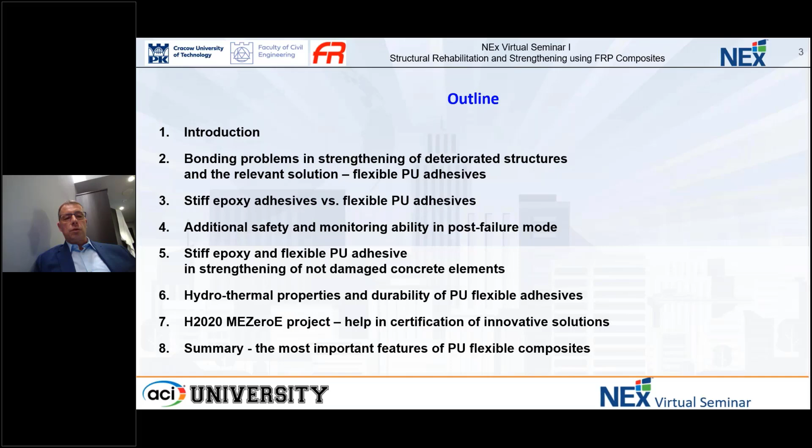I would like to present today, after a short introduction, bonding problems in strengthening of deteriorated structures and relevant solutions for it, meaning flexible polyurethane adhesives. I will compare stiff epoxy adhesive versus flexible polyurethane adhesives, and talk about the possibility of additional safety and monitoring ability in post-failure mode. I will also present some possibilities of strengthening non-damaged concrete structures using stiff epoxy and flexible polyurethane adhesives, talk about the properties of polyurethane flexible adhesives with respect to hydrothermal properties, give some words about the ongoing Horizon 2020 project on certification of innovative solutions, and then in summary present the most important features of polyurethane flexible composites.

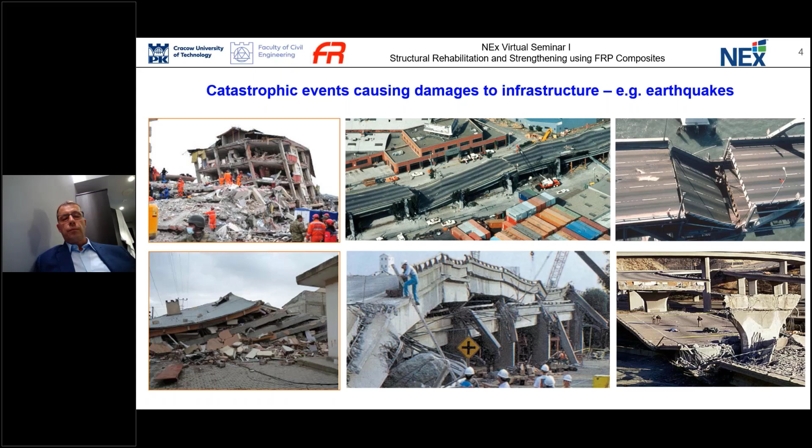If we go around the world, we have many catastrophic events like earthquakes that can influence damage to structures. If the damages are serious, especially to infrastructure like bridges or viaducts, we have problems with escape roads. So such catastrophic events affecting infrastructure should be avoided.

Of course, if structures are damaged or seriously corroded, we have three options: we can demolish and reconstruct them, we can do nothing, but the most appropriate is retrofitting. This requires less time and less money, and has a lower environmental impact. Nowadays we use carbon fibers as the composite material able to improve structural properties, as was presented in the last presentation.

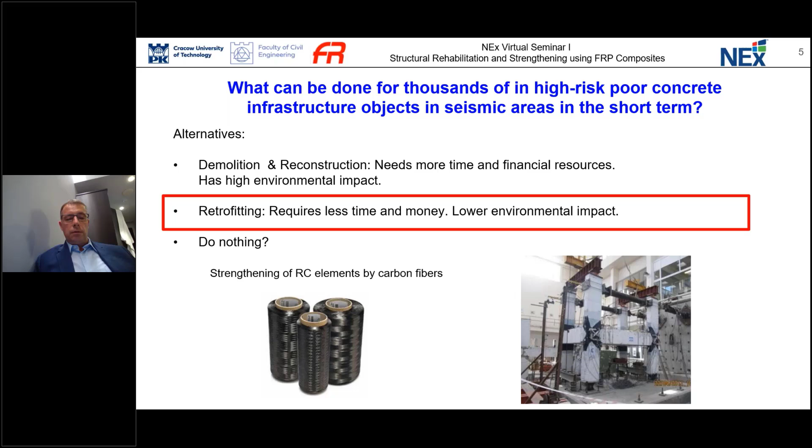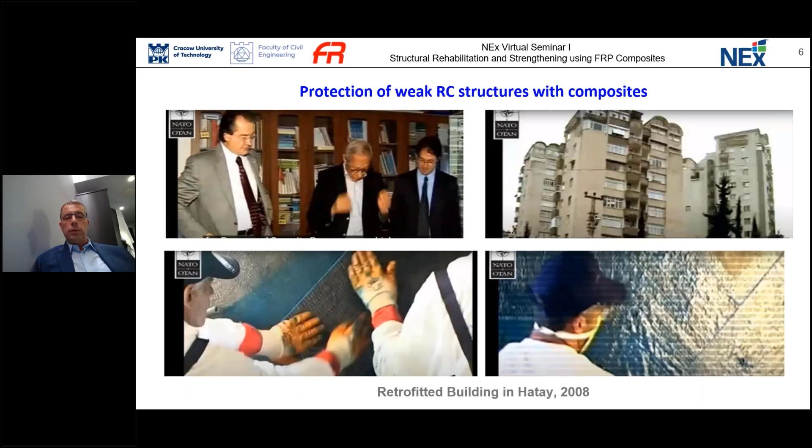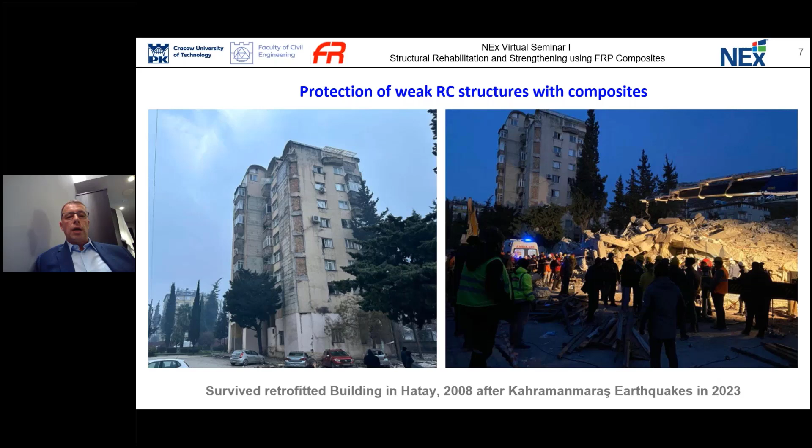I would like to show shortly the effectiveness of such intervention. This is the view of three buildings constructed in Turkey, in Hatay. In 2008, one of these buildings was strengthened with composite fibers by Professor Alper İlki from Istanbul Technical University. Fifteen years later, during a very huge earthquake in Hatay, two buildings collapsed, but the building strengthened with carbon fibers survived this catastrophic event. So it is some kind of proof that it is suitable and worth using composite materials for strengthening structures.

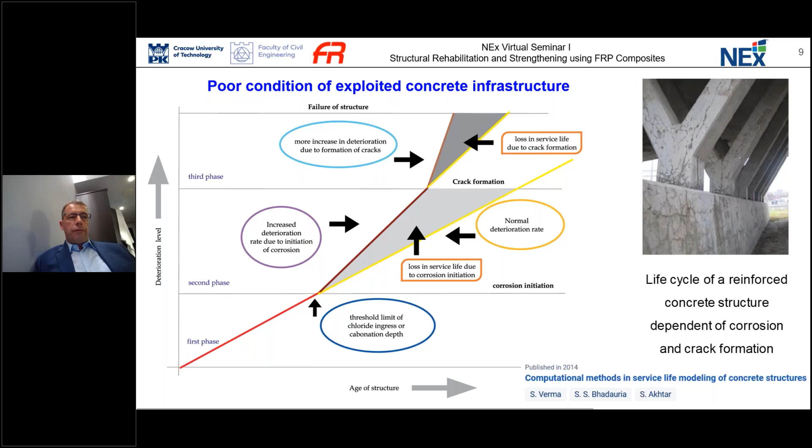Coming to the problems with our infrastructure, we know that over many years structures start to deteriorate, first by initiation of corrosion, then by formation of cracks. The life cycle of reinforced concrete structures is shortening, and in this case we have to consider turning off such structures and stopping their exploitation. So to have the possibility to explore it more, we should think about improvement. Of course, if the structure is seriously corroded, it can cause sudden damage, as presented in the viaduct in Fossano in 2017, where very corroded concrete was the source of this catastrophic event.

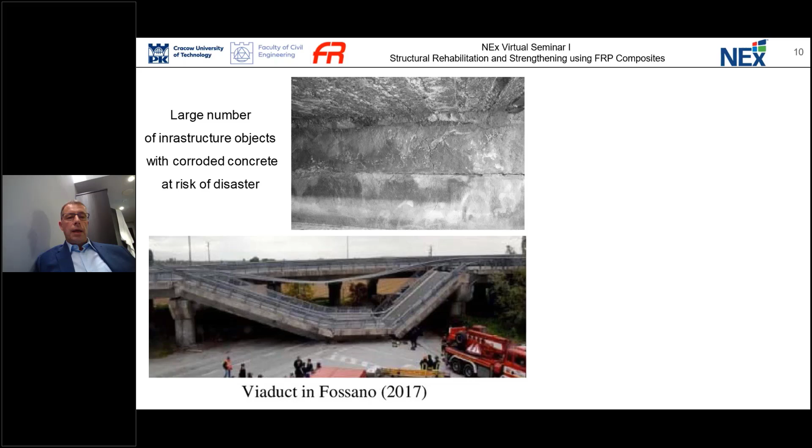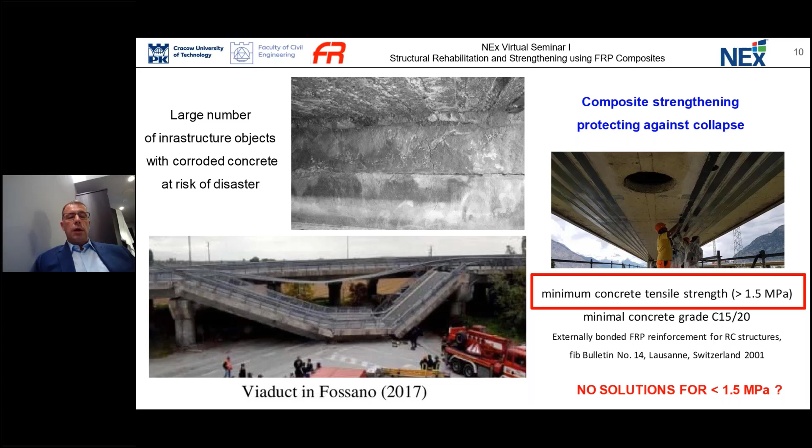If we would like to improve strength nowadays, the most popular method is composite strengthening, mainly carbon fiber laminates, but there are requirements for using it. As the fib bulletin presented in 2001, the minimum requirement for concrete strength is at least 1.5 megapascal of tensile strength, measured in pull-off tests. So if the structure is very corroded and the concrete is of poor quality, it typically has lower values, and the question is whether there is any solution for this problem if we would like to use composite materials.

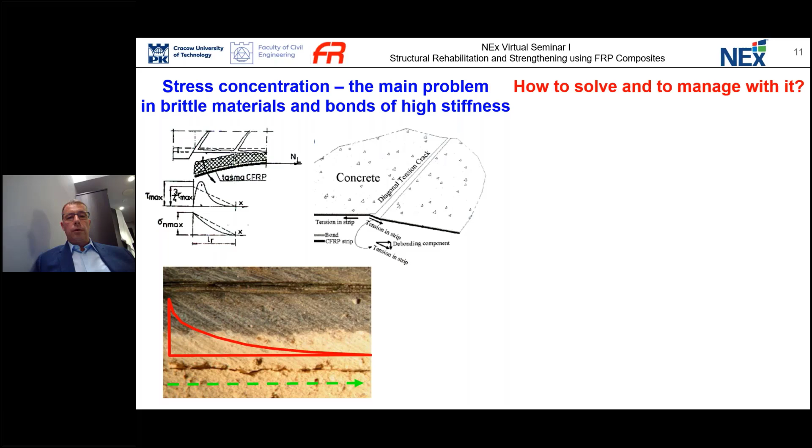One of the most critical sources of damage is stress concentration. When we use brittle materials, high stiffness materials, we have a stress concentration problem, especially with high stiffness materials. This appears mainly in places with cracked structures, but also in the bonding area where high stiffness composite material is bonded to a very weak substrate. In this case, stress concentration causes micro cracks, then larger cracks, and the structure goes to failure. So how do we solve and manage this problem?

It is very simple, because to avoid stress concentration, we should evenly redistribute stress. In this case, we are able to protect the weak substrate because evenly redistributed stress is of lower intensity. If we bond two stiff and high strength materials with brittle and stiff materials like epoxy resin, we can expect stress concentration. If we apply more flexible material, we redistribute the stress more evenly, and we can make more effective bonding of such application.

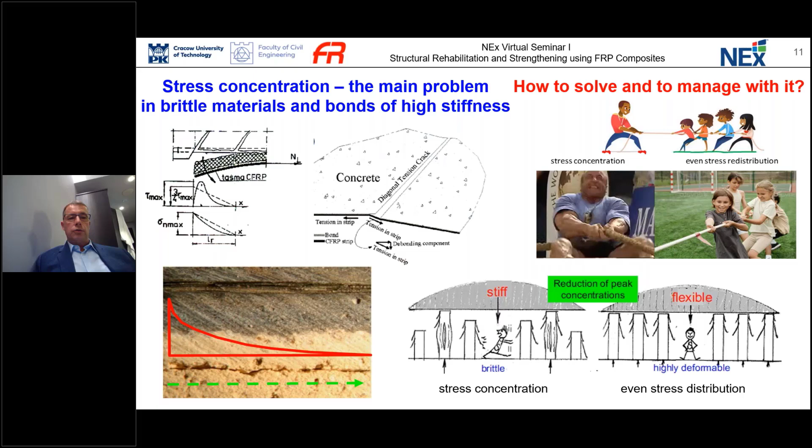Nowadays, we typically use polymeric resin, mainly epoxy, in fiber and steel reinforced polymers. Also, in the last 20 years, we use mineral cement or lime mortar as a matrix in strengthening of structures. In this case, we use fabric reinforced cementitious matrix, FRCM, textile reinforced mortar, TRM, or steel reinforced grout, SRG. Also, now it is available to use highly deformable polyurethanes, fiber or steel reinforced polyurethanes, and this kind of solution is suitable for strengthening of materials, mainly concrete or also masonry, when the tensile strength of the substrate is very low, under 1.5 megapascal.

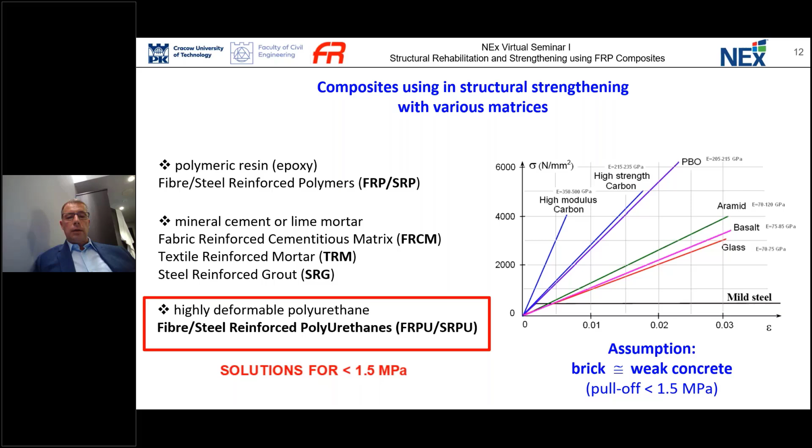Let me make an assumption for the next comparison, that brick and weak concrete are practically of the same strength. So in pull-off test, we have under 1.5 megapascal. I would like to present some tests. This is the brick tested in 4-point bending. The original brick was broken.

Next, in the place of the crack, the brick was strengthened, rebonded again with 3 kinds of materials. If we assume that 100%, this red bar, is the original strength of the brick, and we repair it with strong cementitious mortar, we receive lower ultimate strength. When we apply high strength epoxy resin, we are able to improve the strength of the weak material by about 7%. When we apply flexible polyurethane, PM type, the increase of ultimate strength is almost double, and also the damage is in the form of cohesive failure of the polyurethane.

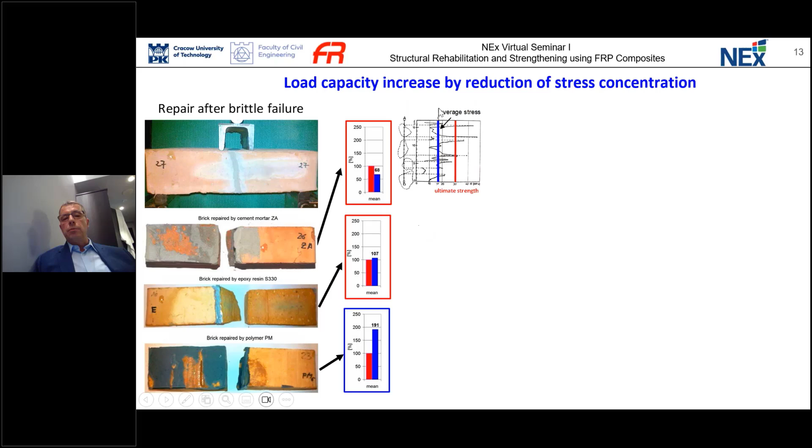Why is this? Because if we have a brittle, high strength material, we have a lot of stress concentrations between gravels, and they can form micro cracks that then link into a main crack. When we rebond it with stiff material, we do not improve the situation. But if we do it with flexible material, we redistribute the stress more evenly, so we are able to increase the ultimate strength.

If we consider the shear lap test, single shear test, you can see that if we bond the composite material to the weak substrate with stiff epoxy resin, we have stress concentration, and after initiation the crack propagates through the whole bonding area. If we bond the structure with flexible material, we redistribute the stress more evenly, reducing the peak of stress concentration, protecting the weak substrate, and also increasing the ultimate force.

This is the example of 2 cases, CFRP material and SRP material, carbon and steel fibers as strengthening material, with epoxy resin shown as the yellow bar, and flexible polyurethane shown as the blue one. You can clearly see that when we use epoxy resin, the ultimate load capacity is up to 7 kilonewtons. If we apply the same system with flexible polyurethane, we receive 12 kilonewtons of ultimate load. You can clearly see this for both systems, one with steel fibers, another with carbon fibers.

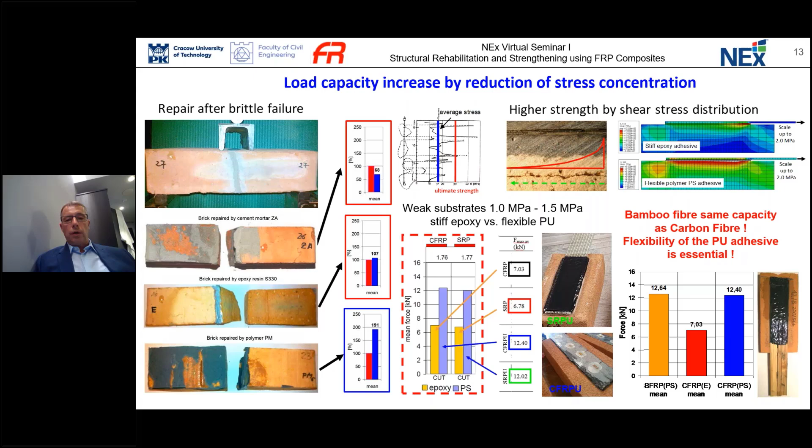Also, when we compare steel reinforced polyurethanes, where we have steel fiber bonded with a flexible polyurethane matrix, and compare it with stiff adhesives, you can see clearly the behavior of this system. If we increase the stiffness of the polyurethane, we receive a higher value, but of the same stiffness level. But when we apply flexible polyurethanes, we receive a much higher ultimate load than in the case of stiff epoxy resin, and also very high damage energy, which is the area under this curve.

What is also tricky is that if we use some composite materials in masonry buildings, in this case we have plasters.

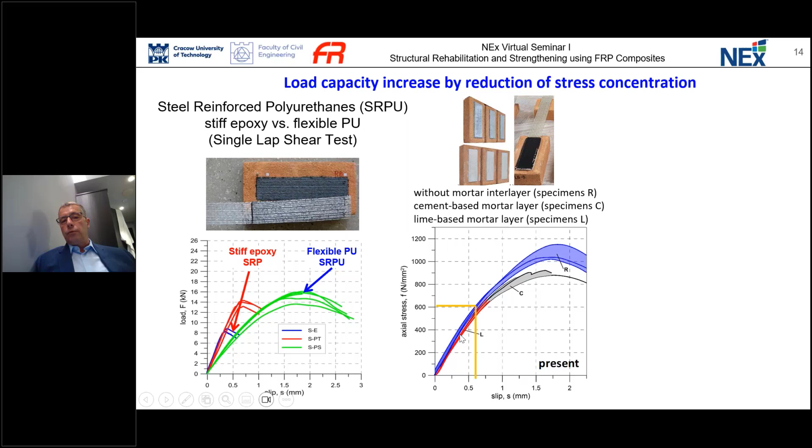So we did some comparison tests. Mainly, we bonded the steel fibers directly to the bricks - this is the blue line. When we bonded the same system but by interface, meaning a cementitious layer, we received this kind of behavior. If we used very weak lime mortar, because this kind of material is used in heritage structures in Europe, we receive directly this red line. You can clearly see that the behavior of this system is very similar to the behavior of this flexible bonding material. If we compare in literature, at the same scale, the effectiveness of this system bonded on the plaster with flexible bonding, it is clearly more effective than lime mortar strengthening with composite materials using the same steel fibers as a matrix.

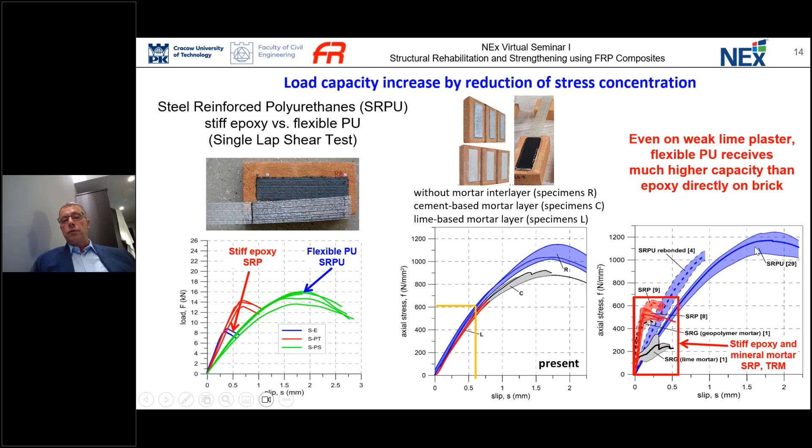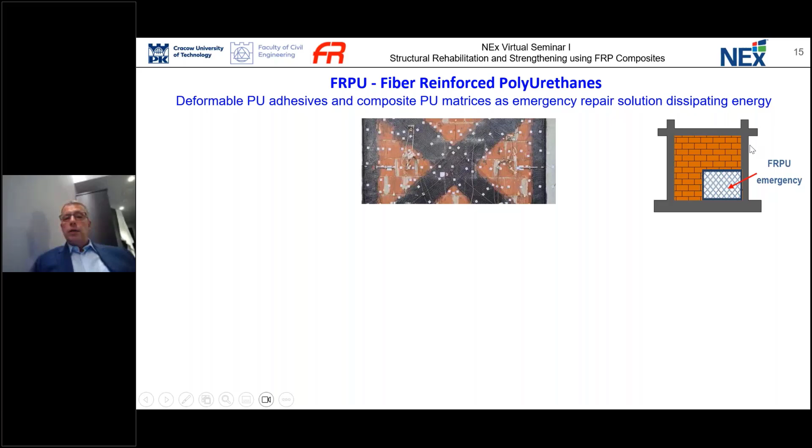I also present the ability of this kind of matrix to deform, transfer and dissipate energy when the load is dynamic or in fatigue. So we used it in strengthening of weak masonry infill when we had a reinforced concrete frame system. In this case, we used glass fibers in a polyurethane matrix that were bonded to reinforced concrete columns and slab, and also to the masonry. Both systems were constructed on a 3D real scale building that was put on the shaking table, and we were able to protect this structure against out-of-plane and also in-plane failure.

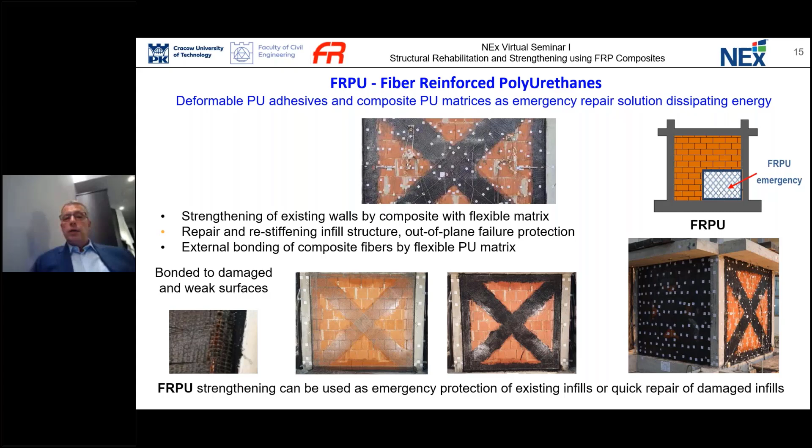So I would like now to present some cases and movies from this shaking table. On the left hand side, you can see the masonry infill wall, protected here with a different type of flexible bonding - let me show you how it works. You can clearly see that the structure is losing its stiffness, and finally at the end of this test it did not collapse, due to protection with polyurethane flexible bonding at the interface between masonry and the reinforced concrete structure. The global stiffness was lost from 100% down to only 6%.

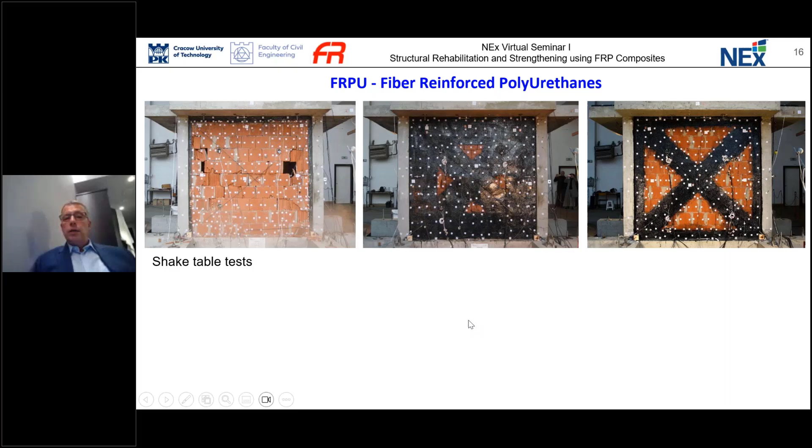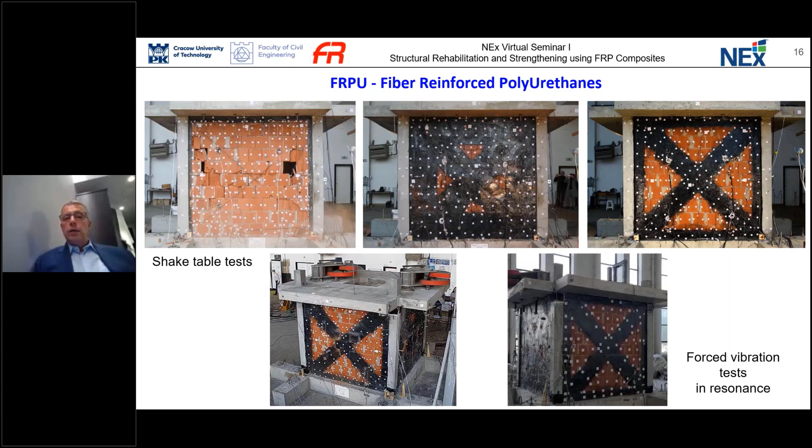After that, we protected this kind of infill wall with an FRPU system. So in the middle, you see protection against failure of this kind of wall without any special application, smoothing of the surface. We bonded directly the fibers using the polyurethanes, and in this case we were able to stiffen the whole structure. The owner of the shaking table was unable to damage this structure with this system, so they tried to damage it with forced vibration in resonance, mainly by application of special exciters on the top. As you can see, during this resonance test, which lasted 2 hours, they were unable to damage this structure.

Also, the proof of the efficiency of such flexible bonding systems was the quick emergency protection of a concrete retaining wall that was being demolished on an active slope. In 1 minute, the movement of this wall was about a few centimeters, so it was a really serious danger because the house was able to collapse. We had to stop it. Within a few hours, we stopped the movement of this retaining wall on the active slope.

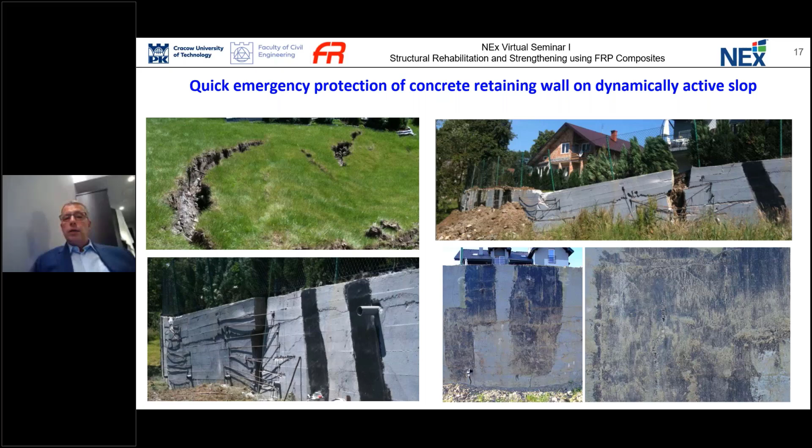So why is this kind of solution so effective? Typically, if we calculate composite materials strengthening brittle materials, we use a fracture energy approach. In this case, we assume that the composite material is stiffly connected with the substrate, and we calculate the fracture energy that allows us to transfer these forces.

So with the bonding length - meaning the length of the composite material that is connected to the substrate - if the bonding length is under the effective bonding length, the ultimate length that is working, we are in this curve position. If we increase the bonding length, we are able to obtain this maximum capacity. And if we obtain this maximum capacity with brittle and stiff materials, the peak of stress concentration cracks the substrate and transfers up to the end of the structure.

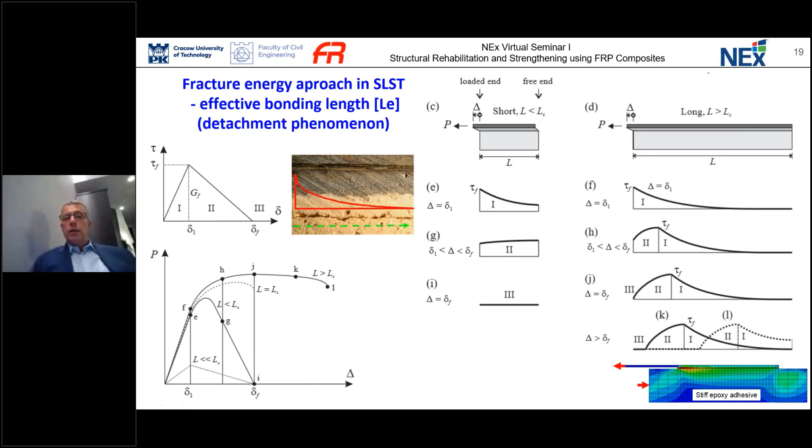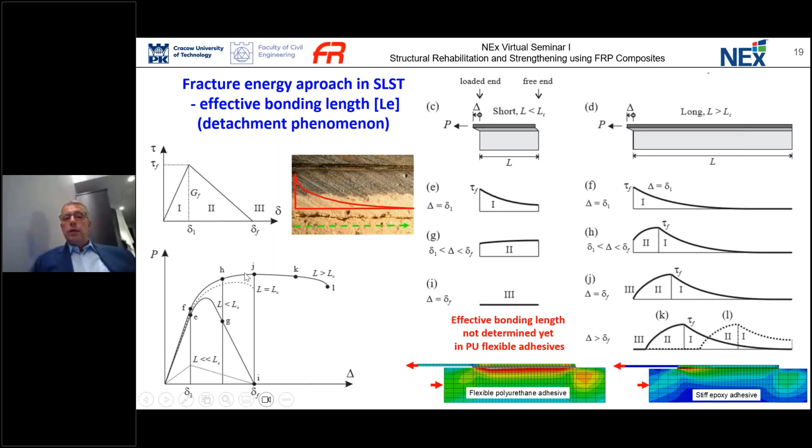So you can observe this process here. This is mainly with stiff epoxy resin when we use it for bonding of composite material. What is very tricky is that when we use flexible polyurethane adhesives, we are still under the effective bonding length, so we still have the possibility to increase the capacity of the system.

But what is very interesting, after unloading, the structure moved back to the previous position. So in this case, we give time for evacuation, and also we give authorities time to decide how to manage such a structure.

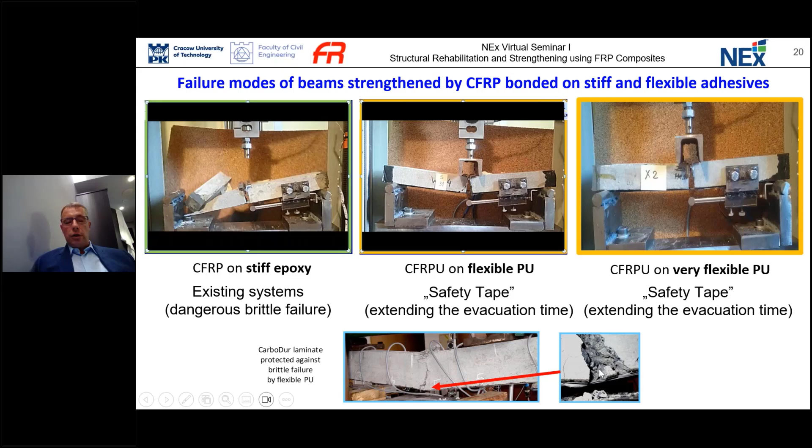Also, as you can see here, there is high stress concentration acting on the composite material. Typically, if it is stiff material, such a structure doesn't work, but with flexible material, it is able to work.

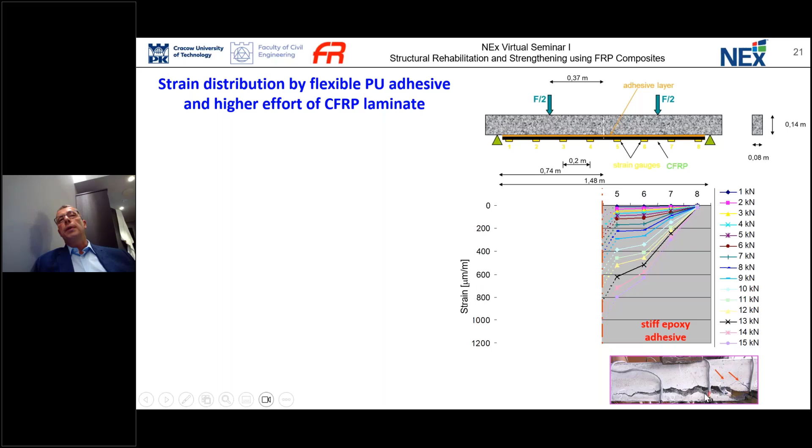If we compare the effort of this composite material when we have stiff epoxy resin, we can compare it according to the load. But finally, we can expect very sudden failure, especially in the weakest part, that is the reinforced concrete, the place of location of reinforcement in the concrete.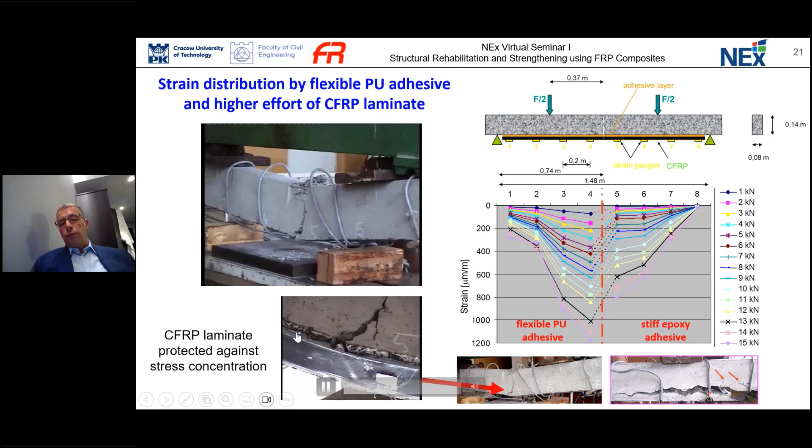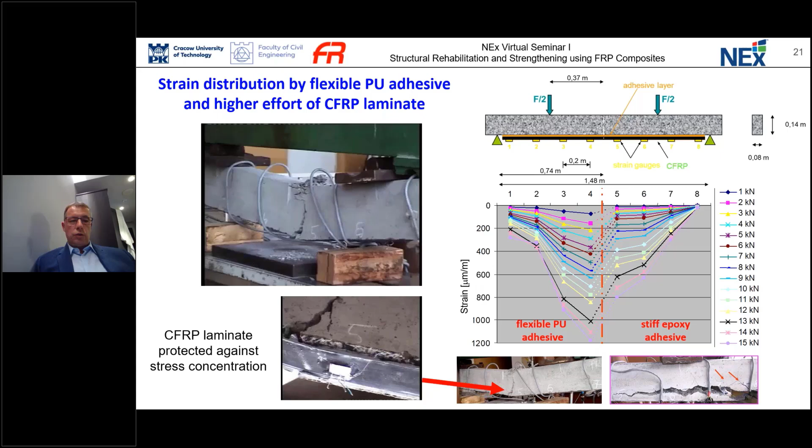Even after removing this part, you can clearly see that this kind of flexible material is able to dissipate energy and clearly protect the composite material against stress concentration. So the composite material is not damaged.

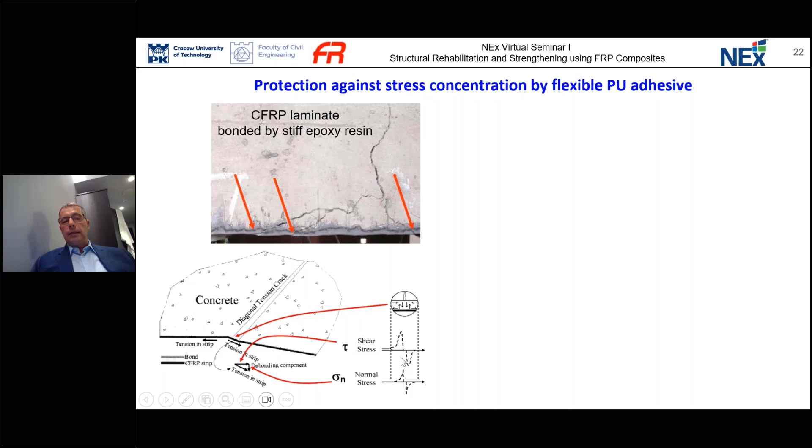So if we would like to protect the composite material because of cracks in stiff epoxy resin, the crack generates in this place very high stress concentration that is acting on the composite material.

If we have flexible material, you clearly see here that the crack is stopped in the flexible adhesive layer, and in this case we do not have the stress concentration attacking the composite material, because the stress is redistributed more evenly on the whole surface.

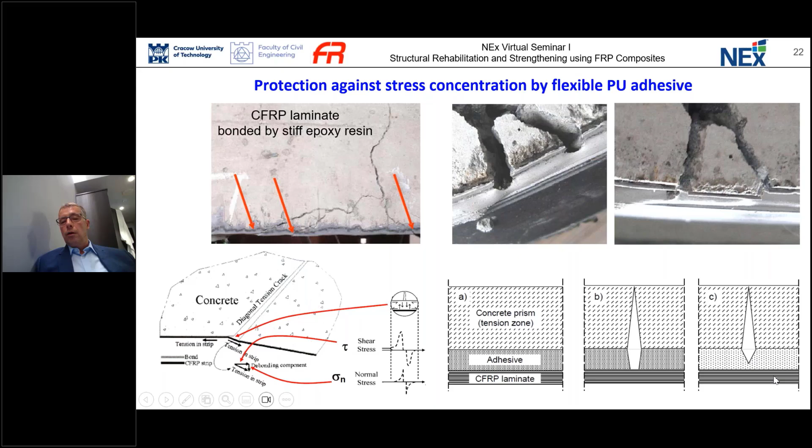So let me say something about additional safety. This is an experiment on a beam that was failed by fatigue tests. So after this fatigue test, the lower tensile reinforcement was broken.

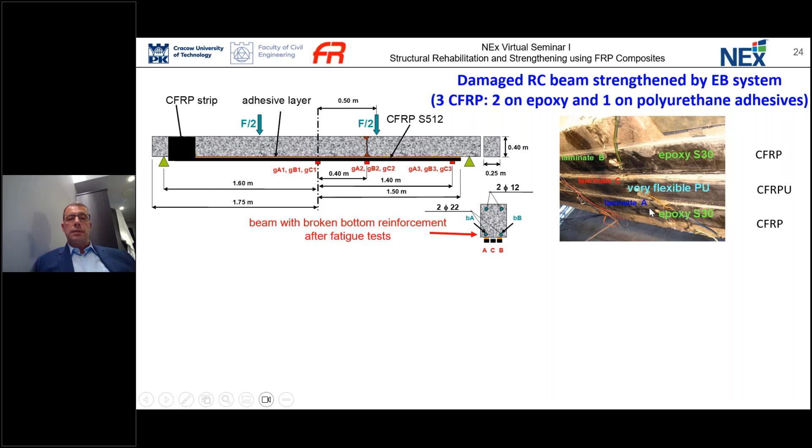So after reconstruction, the strengthening and tensile forces were carried out by 3 carbon fibers. 2 of them were bonded on epoxy resin, stiff epoxy resin, and 1 on very flexible polyurethane.

During the test, you can clearly see that in one moment, laminates bonded on epoxy resin suddenly failed and detached, and everything was hanging on the laminate bonded on flexible polyurethane. Here you can see cohesive initiation of failure in the cohesive layer.

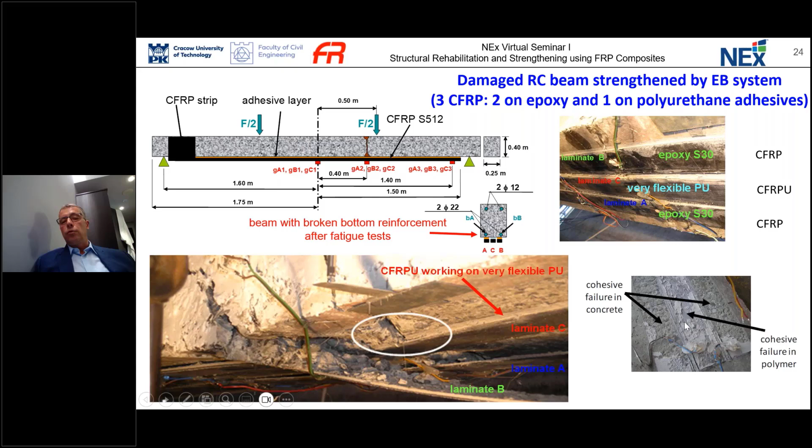So finally, when we detected the failure, you can see cohesive failure in concrete in epoxy resin, and cohesive failure in polyurethane in the case of the very flexible polyurethane strengthening.

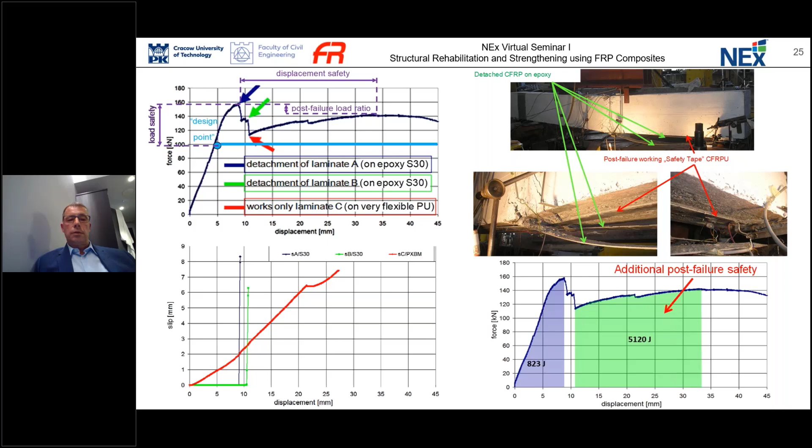It was also confirmed in another kind of test in Portugal. We had the slab, but we applied not an externally bonded system, but a near surface mounted system, so carbon fiber was installed in a groove at the bottom of the slab with 2 kinds of epoxy adhesive.

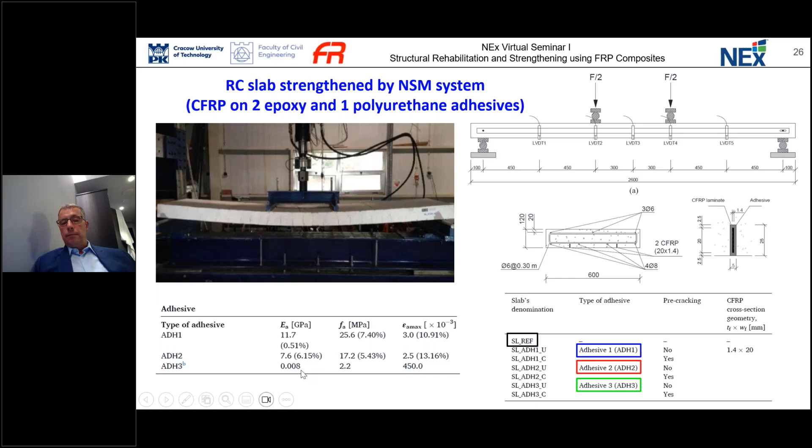You can see 11,000 megapascal stiffness. Another one was 7,000 megapascal stiffness, but the polyurethane flexible bonding was only 8 megapascal system. So we tested 2 kinds of structures. One was uncracked and another was pre-cracked when we installed the NSM system.

The blue and red curve in both cases represent the adhesive with stiff epoxy resin, while the green one represents polyurethane. As you can see, practically these systems do not differ so much, but in the case of polyurethane adhesive, we have the post-failure resistance that can improve additional safety to the structure.

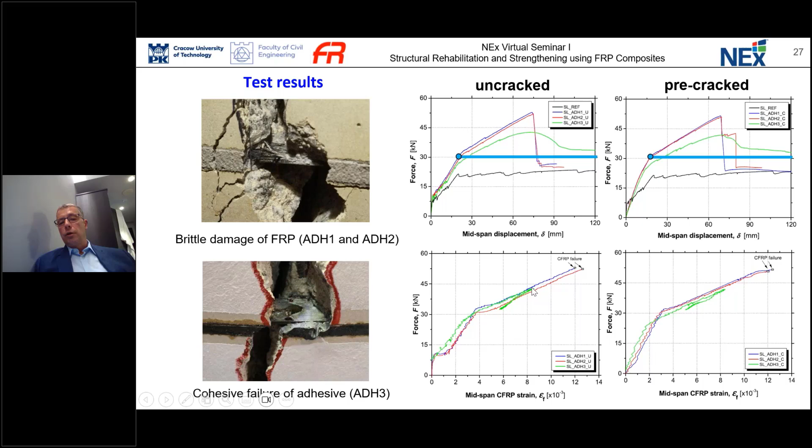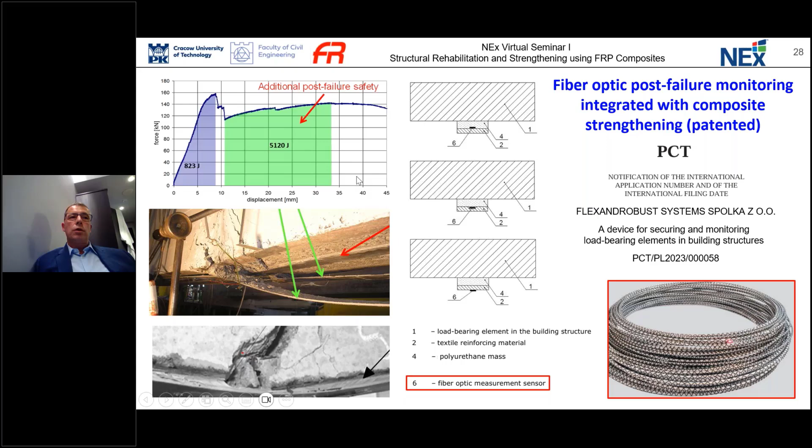This is also confirmed when we observe the strain measured on the composite material. So if we have such ability to apply this kind of flexible bonding, it is also useful to integrate it with some kind of fiber optic measurement system that can monitor the structure after failure. In this case, we give authorities post-failure information on how the structure works, if it is safe, if we can still use it, and what can we do with it.

I would also like to show you some examples of tests with undamaged, reinforced concrete beam. In this case, with the same system, we used the same type of carbon fiber, but the only difference was epoxy resin in one case, and a polyurethane adhesive layer on the other side. So you can compare the Young's modulus of these systems: epoxy resin had 12,000 megapascals, while polyurethane PT 600, PS 8, PST 6, had 2.5 megapascals.

On the other hand, you can compare the elongation. We start from 0.22% for epoxy resin up to 150% for PSM type polyurethane flexible adhesive.

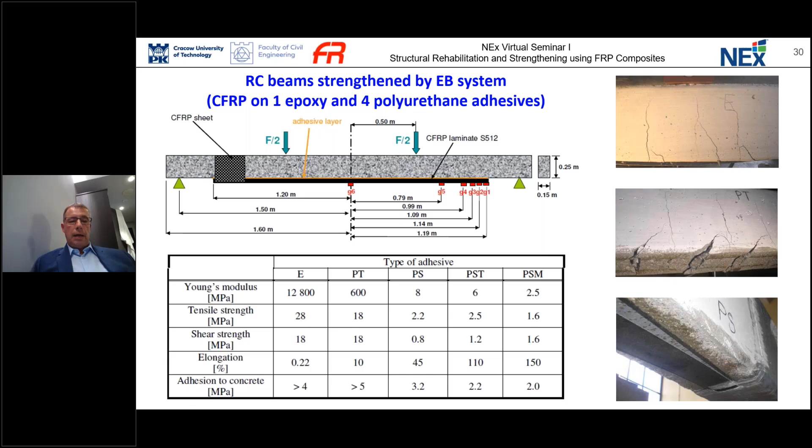If we compare, on the same scale and same graph, the curvature of behavior of this system with a reinforced concrete reference system, you clearly see that all these systems practically behave in a similar manner. This dark blue line represents the epoxy resin.

As you can see, the slippage at the end of the system shows practically no slip for epoxy resin, but even a small amount of slippage, 0.3 millimeters at the end of the system for this PS flexible bonding, makes a very big difference and improves the behavior of the structure, even with higher capacity than the epoxy resin.

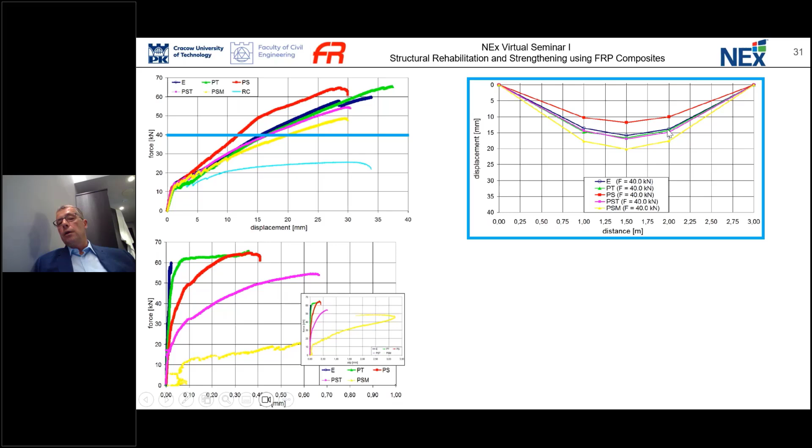What is also tricky is that when we compare one level of load, you can clearly see that we received even lower deflection using flexible adhesive than using very high strength, stiff epoxy resin adhesive. Why is that? Because, as I said previously, when we have stress concentration, the crack goes through the stiff epoxy resin immediately and attacks the composite material, causing stress concentration.

If we have higher stress, we have, of course, higher elongation. In the case of flexible material, we stop the crack in the adhesive layer and redistribute the stress more evenly. So in this case, the peak stress is lower, and the elongation of the composite material is also lower. So in this case, the confinement effect is more promising.

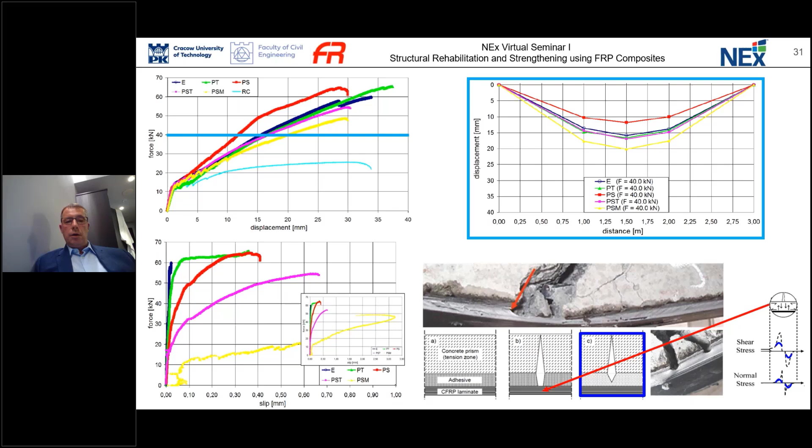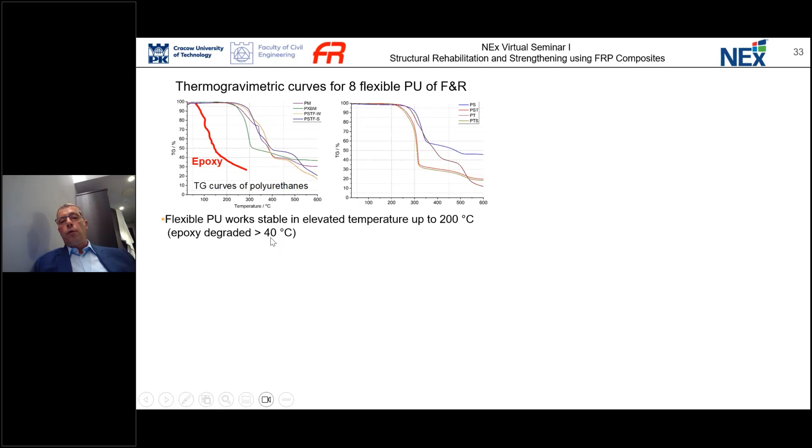This is presented here on the graph. I would like to add some features of the polyurethanes we use. In thermogravimetric measurements, they showed stable properties up to 200 Celsius degrees, so working in elevated temperatures, the polyurethanes manifest very stable behavior. On the opposite side, when we use epoxy over 40 Celsius degrees, it starts to degrade and loses its properties.

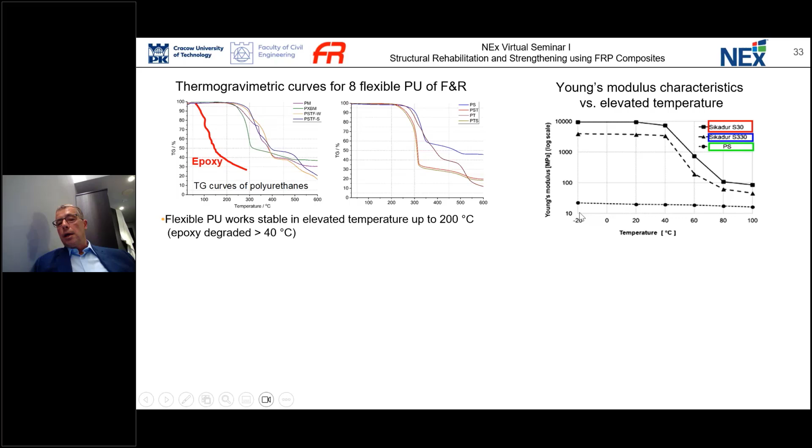When we compare the Young's modulus behavior according to temperature increase, using two epoxy resins, for example Sika materials like Sikadur 30 and Sikadur 330, in comparison to polyurethane PS, you can see on the logarithmic scale on the vertical axis that over 40 degrees there is a serious drop in the properties of epoxy resin. In the case of polyurethanes, there is practically stable behavior.

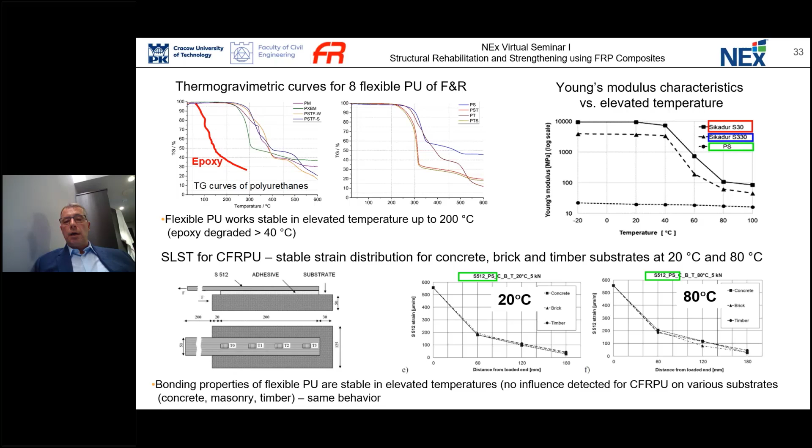If we compare this single lap shear test at two temperatures, room temperature and elevated temperature, for the system where we bond composite material with polyurethanes to three kinds of substrates - concrete, brick, and timber - you can compare that on the same scale, practically the behavior is the same, so there is no difference in behavior when we apply elevated temperatures.

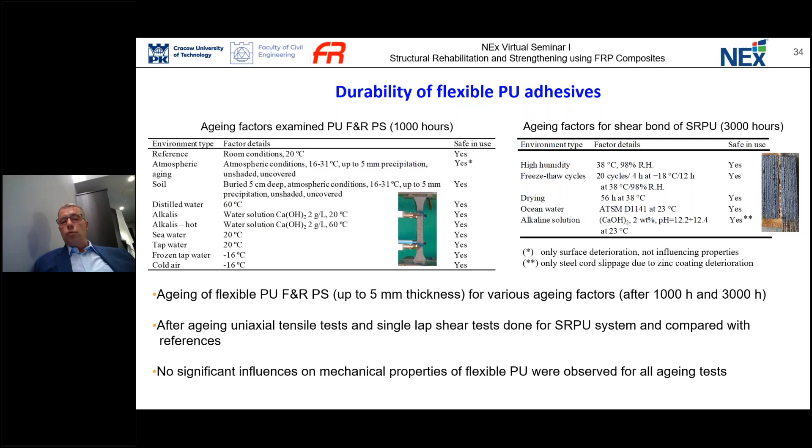Also, we did many tests regarding durability of these polyurethane flexible adhesives. Please do not confuse these polyurethanes with polyurethane foam used for installing windows, because it is a completely different special material. We tested it for various aging factors after 1000 hours and also 3000 hours, and no significant influences on mechanical properties of these flexible polyurethanes were observed during these aging tests.

Also, if we consider the polyurethane according to hydrothermal properties, in this case we can say that the vapor permeability is low, and the vapor diffusion resistance is very high.

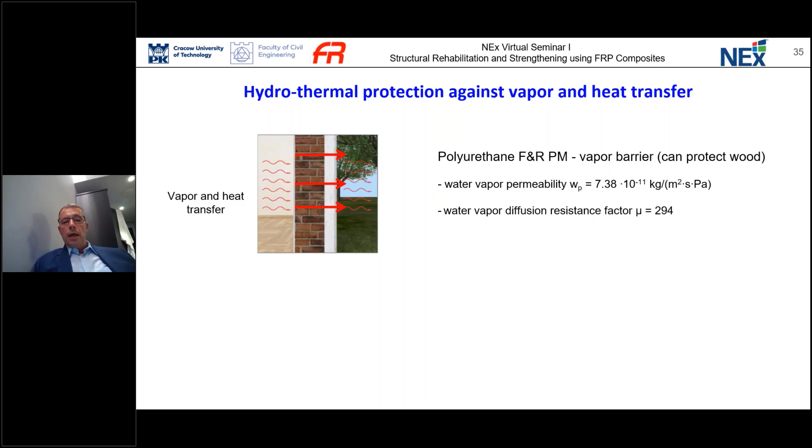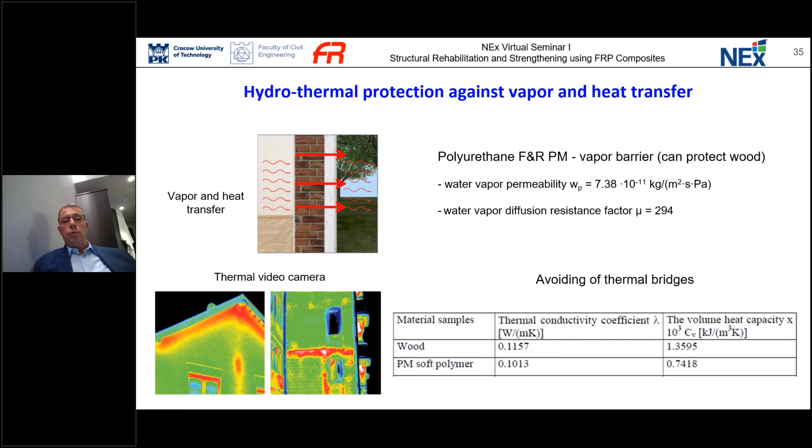So also, if we compare the thermal properties, as the material that avoids thermal bridges in buildings, it can be comparable in properties to wood. So it is also a very good material with promising thermal conductivity coefficients.

We tested this kind of material in the special project in Europe, Horizon 2020. It is the MEZeroE project, measuring envelope products and systems contributing to the next generation of healthy, nearly zero energy buildings. In this case, we are obligated to fulfill the requirements of European regulations, and we are targeted on innovative materials, because this kind of adhesive is innovative.

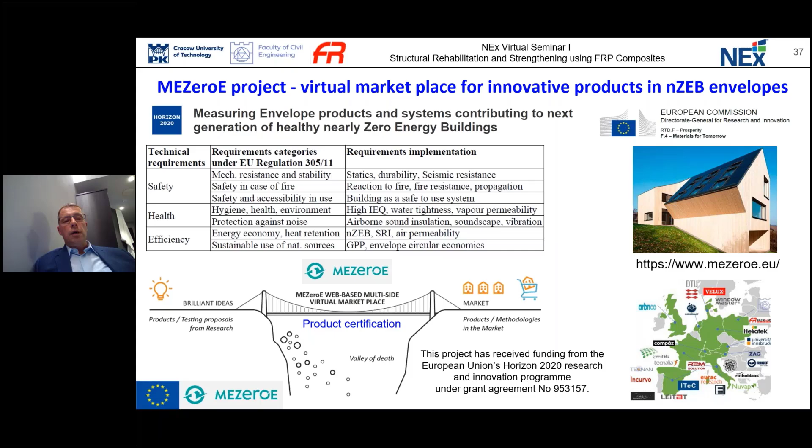Even if we have a brilliant idea, we have to move to the market. So if we would like to go to the market, we need some kind of certification confirmed by testing. In the frame of this project, we created a platform to help innovative products move to the market quickly. My university is involved in this project, and we are able to test innovative products mechanically with vibroacoustic testing, thermal testing, and also durability testing.

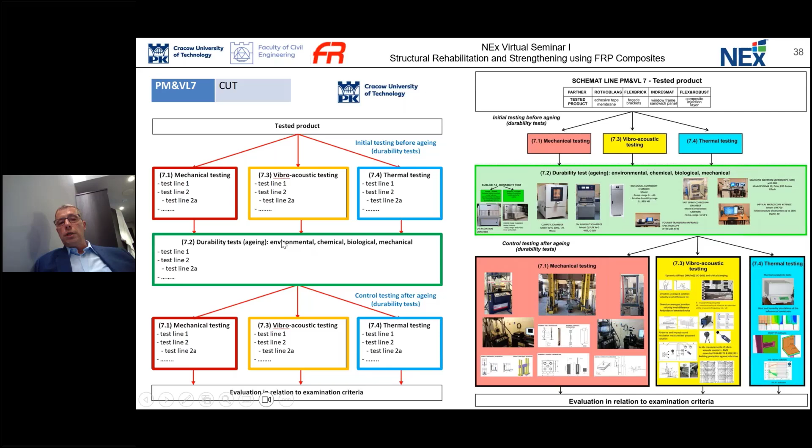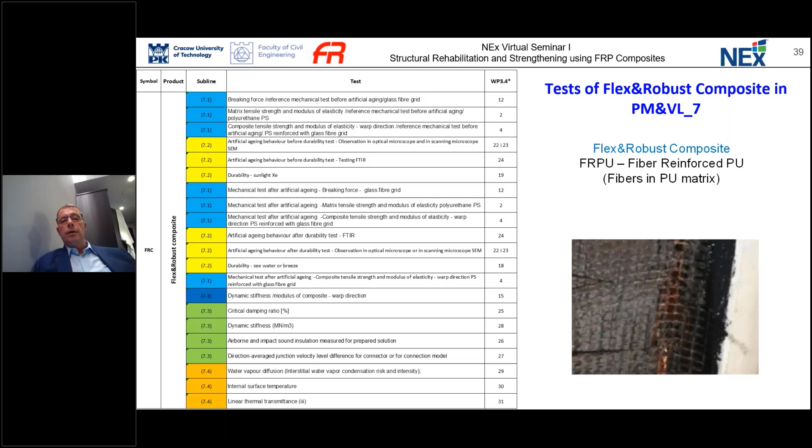Using these pilot lines, the products of Flex and Robust system, I mean these flexible fiber reinforced polyurethanes, were tested with different tests, and were also installed on the living lab, where now this system is being observed during living lab use.

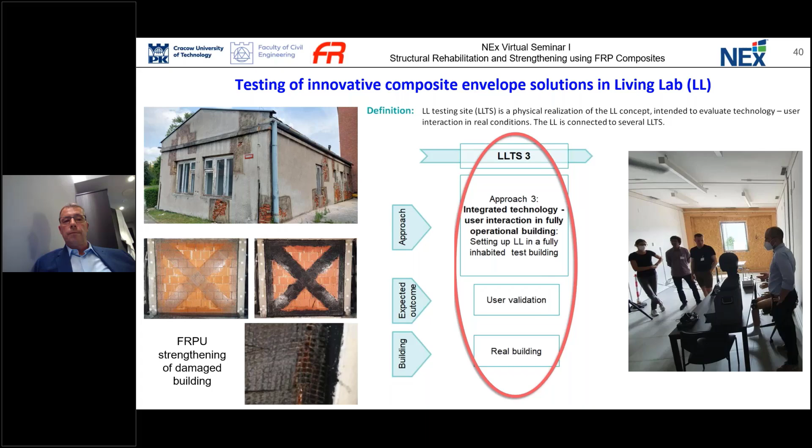To summarize my presentation, I would like to point out two groups of features. Mainly, I would like to point that strengthening of weak reinforced concrete and masonry structures can protect the structures against collapse effectively. Using this flexible composite system, we introduce additional post-failure safety and stress redistribution because we use a larger area of bonding material.

Also, we have post-failure deflection that is visible, and it warns the user of the structure, but having a large deflection, we are also able to carry high loads. A failing structure, reinforced concrete structure, when strengthened with carbon fibers, polyurethanes bonded with this composite material, is protected against sudden brittle failure.

This is very promising because it gives time for evacuation of people, and also gives authorities time to decide what to do with this kind of structure, whether it should be supported, or maybe can be repaired or strengthened in another way.

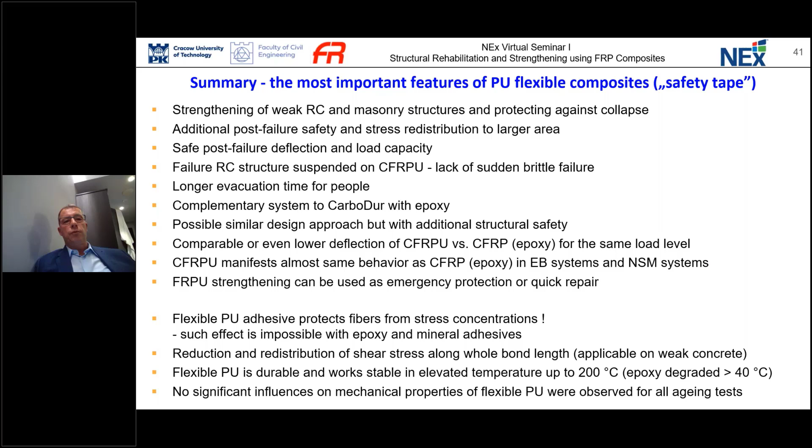Additionally, I would like to point out that this kind of flexible polyurethane is resistant to high temperature, up to 200 Celsius degrees, so it can work in elevated temperatures instead of epoxy resin that starts to degrade over 40 Celsius degrees.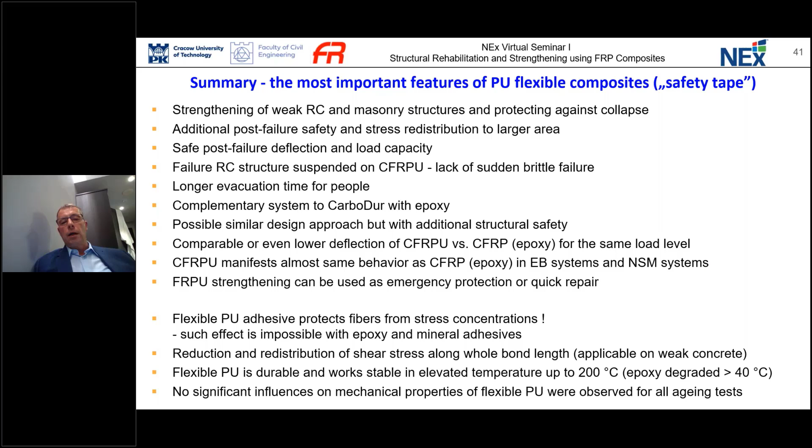And also during aging tests, we did not find significant influence on the mechanical properties of flexible polyurethanes. So thank you very much, I am happy to answer questions.

Thank you so much, thank you so much, Dr. Arkadiusz. We have one question: where can I learn more about FRPU? Could you repeat, excuse me? So one of the audience wants to learn more about FRPU, so he is asking where he can learn about it.

I published this information. If you type my name into the internet with some papers according to composite strengthening or polyurethane flexible bonds, you can find it. Also, you can find some movies on the website of my company, Flex and Robust Systems. You will have this presentation. Just at the beginning of this presentation, on the second slide, there is the name of the company, so you can easily find it. Or you can contact me also, I'm a university professor, so my email is also available.